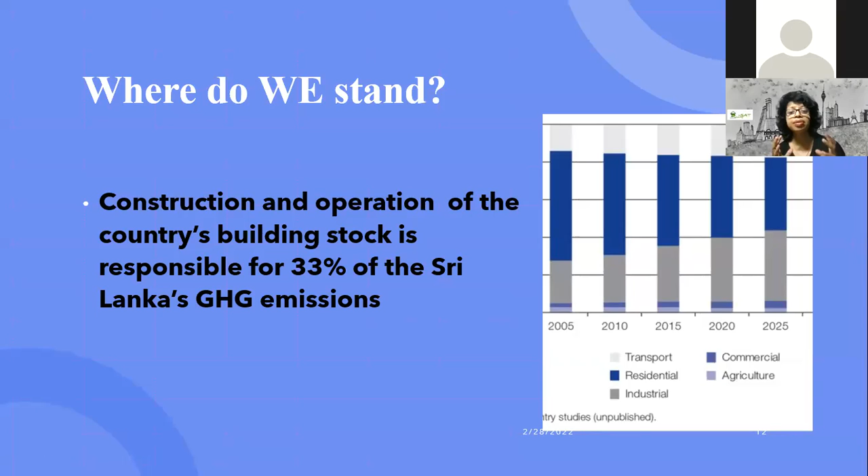The country's building stock is responsible for about one-third of GHG emissions in the country. That is a considerable amount that we have to seriously consider.

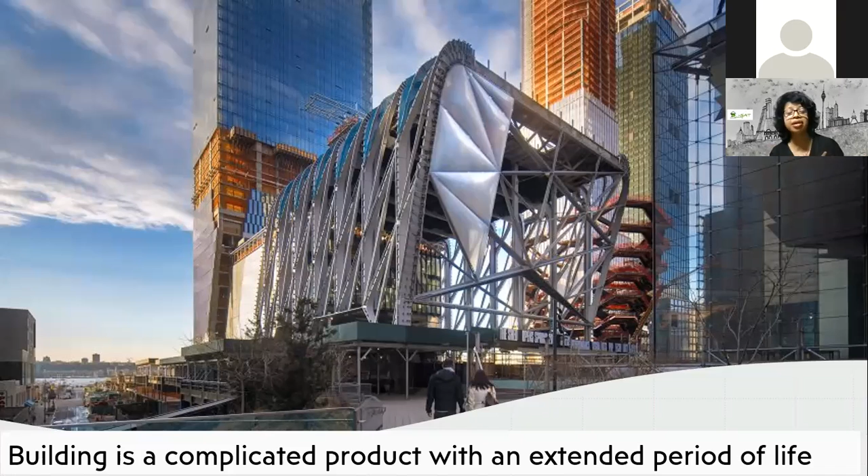Let's have a look at the specific buildings, considering that as a special product. We can say it's a complicated product with an extended period of life. Constructing a building would consume different types of building materials, and at that point it's like a large number of products, so it can be considered as such.

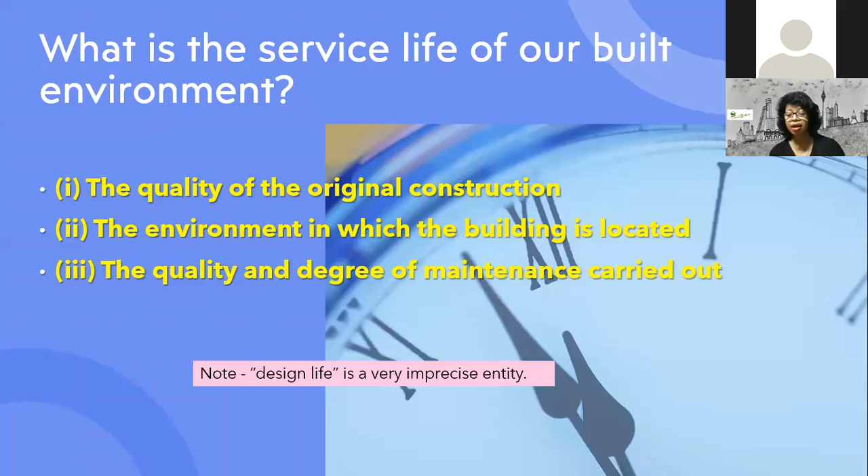Let's stop for one moment and think about its service life. Acknowledging the fact that the design life is a very imprecise entity based on the quality of the original construction, the environment in which the building is located, and the quality and degree of maintenance being carried out throughout the service life, you can identify the service life of all the different types of buildings in this kind of service life range.

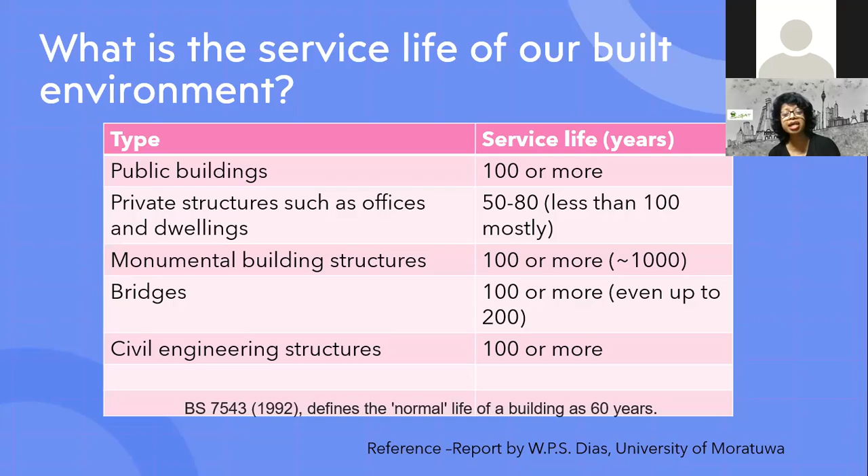If you look at public buildings, I have used a reference here, the report by Professor Priyan Dias of University of Moratuwa, and also as per the BS standards, defining the normal building life as 60 years, public buildings would last 100 years or more. Private structures such as offices and dwellings usually go up to 50 or 80 years. Most other monumental buildings, bridges, and civil engineering structures would last more than 100 years, let's say.

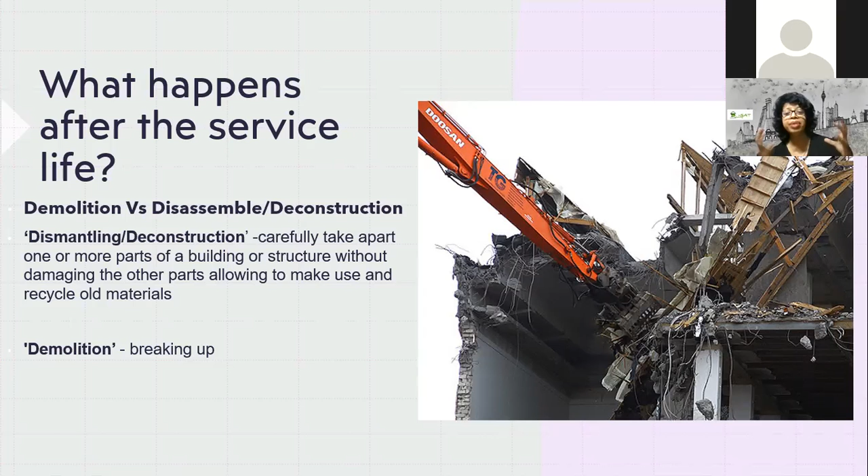So what happens after the service life? If you look at the Sri Lankan context, though I have put demolition versus disassemble, the most common terminology, or the concept being used in our country, is demolition. Demolition is easy to understand—it's like we are trying to take the building down or break it up. Dismantling, on the other hand, is kind of a process where we carefully take off the parts of the building, or rather deconstruct the elements, preserving them for future use.

So usually what happens in the country, in Sri Lanka, almost all the demolished structures end up in landfills. You can see there is no circularity in this model—it's a linear model. We take, make, and dispose.

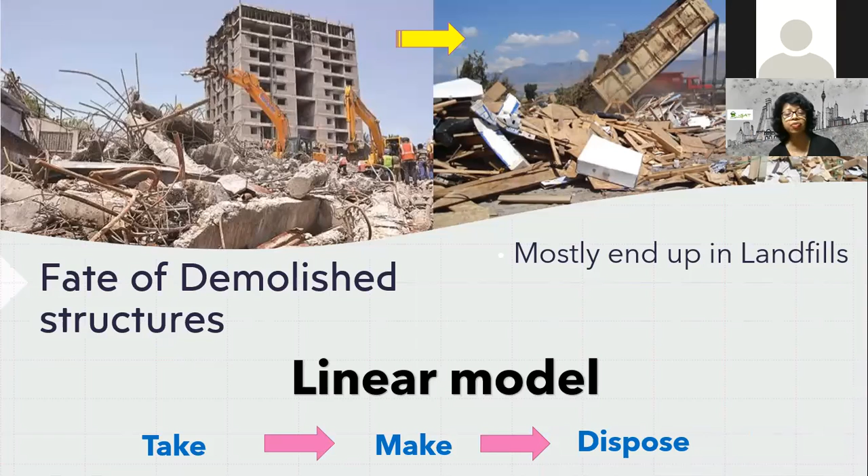Let's have a look at this disassemble and deconstruction concept, where we are much more familiar with the concept of urban mining, which is applicable for electronics—we know e-waste. The concept of urban mining has been around for more than 10-15 years. Similar to that concept of urban mining, we should be looking at constructed infrastructure as material banks, where we can deconstruct and extract the available resources that have gone into the construction.

This is the kind of full potential of the circularity of the built environment. Rather than looking at a demolished building as a heap of garbage or waste that has to be taken into a landfill, we have to change our thinking to see the usefulness of material. In the e-waste management industry, they have realized that we can mine more pure material like gold, silver, and other precious materials by urban mining. If you really look at aging buildings as material banks, we will be able to reap much more benefits than what we can even imagine today.

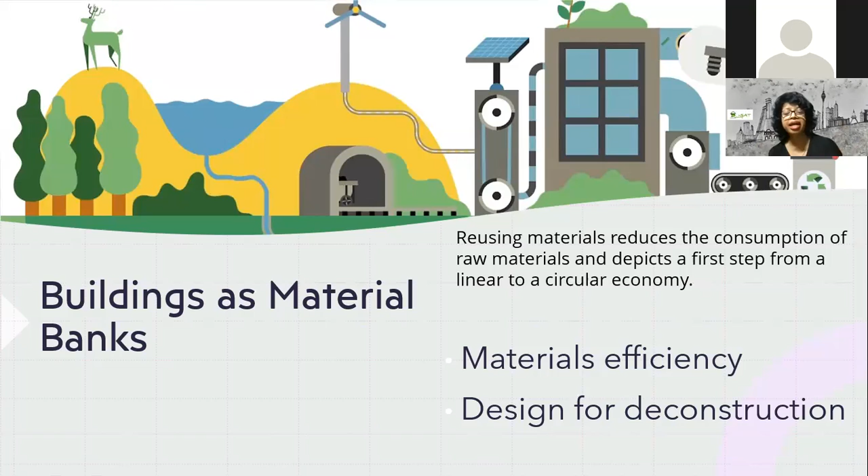When you look at this concept of buildings as material banks, at the end of the service life, we can readily understand that reusing material reduces the consumption of raw material. This is the real meaning of circular economy—preserving the material and keeping it for reuse and recycle. So we are concentrating on material efficiency and concepts like design for deconstruction. These are topics we have to consider more and more if we are investing in ideas like buildings as material banks, because for deconstruction, you need to think about it right at the design and construction stage itself.

So let's have a look at what is circular construction. Most of the time, we would like to think of circularity in construction with respect to material, or closing the material loops only. But if you look at it holistically, circular solutions on the level of material, processes, and the building itself as a whole need to be incorporated to ensure circularity in the built environment—not only material, not just closing the loop of materials.

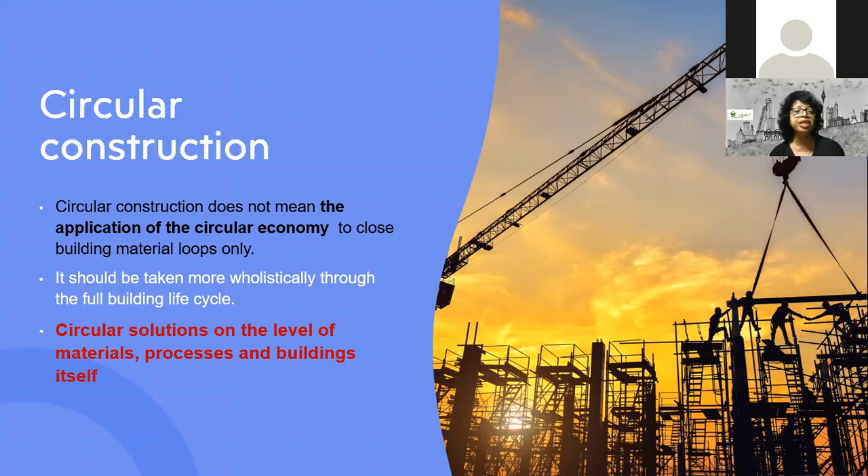Going further into the Sustainable Development Goals, we have to understand that circularity is a way to achieve sustainable consumption and production. Also, when we talk about the built environment, we have to understand that it is interconnected with the other goals of the SDGs among the 17.

We can see that the impact of buildings and the construction sector was recognized as a key contributor to global emissions for the first time at the Conference of Parties, COP21, in 2015. So this is something very timely and essential that we all have to understand.

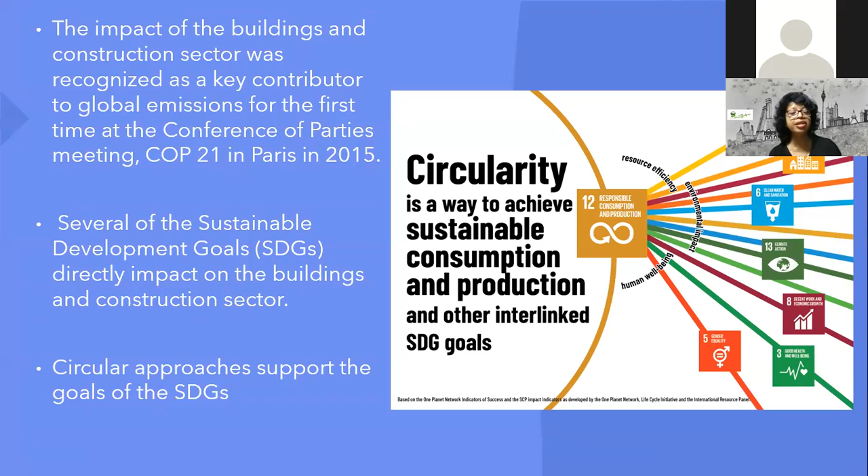Several of the Sustainable Development Goals directly impact the buildings and construction sector. I'm not going to take time to go into these areas, I'm sure you are familiar with these 17 SDGs. Circular approaches definitely support the goals of the SDGs, so we have to keep that in mind as well.

I would like to draw your attention to the NDC submitted by Sri Lanka in 2021. Despite Sri Lanka being a low carbon economy, having a low carbon footprint, and also being in a highly vulnerable status right now, we have committed to increase forest cover by 32% by 2030. And most importantly, we are planning to reduce GHG emissions by 15%, quite ambitious, isn't it? And that is by 2030.

So within the next 8 years, we have a target to achieve, that is from the power sector, electricity generation. You can understand most of this energy is consumed in buildings in Sri Lanka. If you look at it, more than 30% of the generated electricity is used by the building sector.

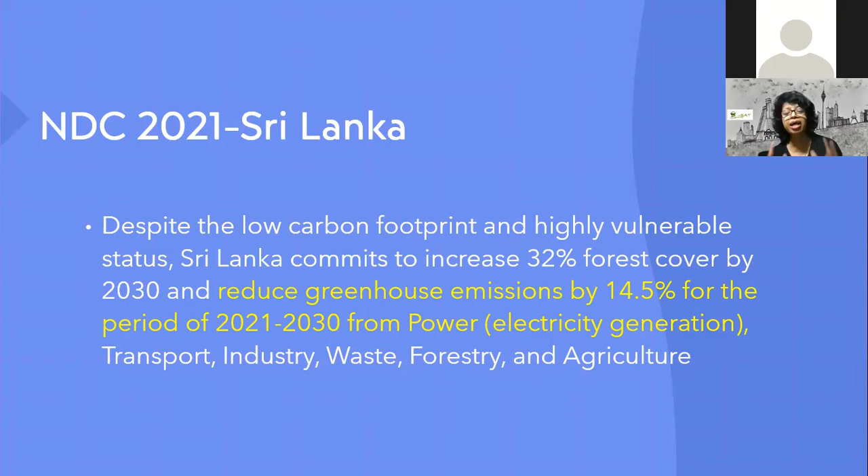So you can see we have a large say in this commitment, and we have to deliver. The construction industry as a whole has a responsibility to support this. So what does that imply? The building sector should act fast if we really need to meet the Paris Agreement by 2050, within the next 30 years. So what does that imply?

We need to think differently. The theme of our future buildings should be climate resilience, and we can achieve this through different mechanisms, which you have probably been learning about already: efficient use of energy, efficient use of material, and efficient use of water.

There are ample examples around the world if you really want to move towards net zero achievement. So the way forward in this aspect would be the keywords that we have to go after, like standardization, new forms of collaboration and co-creation processes, digital innovation, education and information sharing. These are the key elements we need to incorporate into our thinking and actions.

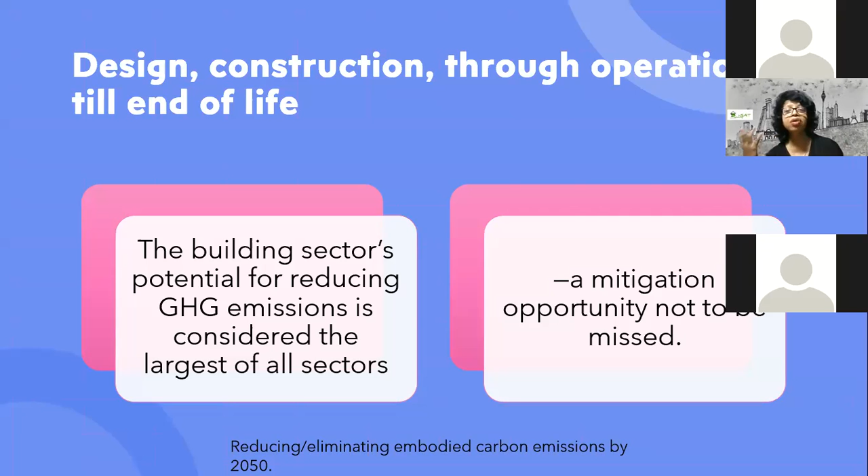Again, we can see the potential of the building sector for reducing GHG emissions can be considered the largest of all sectors. This is an opportunity we should not miss. We have to consider this through design, construction, operation, till end of life.

So that means whatever decisions we take during the design and construction stage will impact the long operational years of a building, as I indicated, maybe 100 or more years till end of life. So what are the actions we have to take during design and construction?

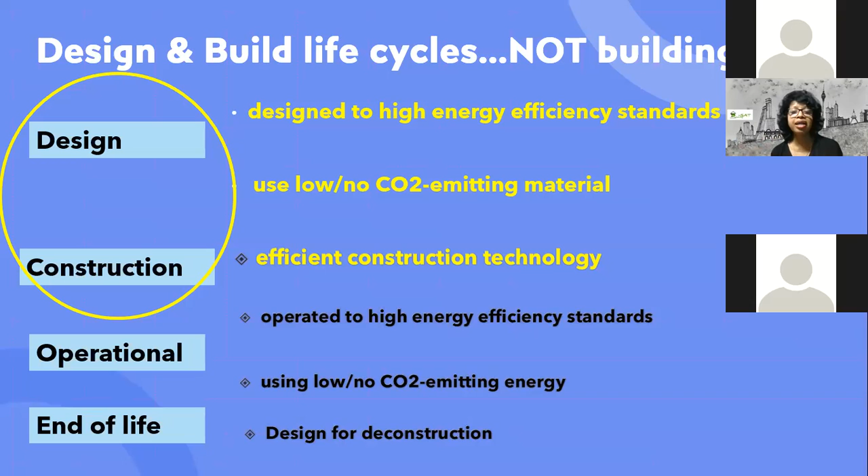We should pay attention to designing high energy efficiency standards in our buildings, and we can go for low CO2 emitting material, meaning selection of material should be done properly, and efficient construction technology use, and operate to high energy efficiency standards, using low or no carbon emitting energy as much as possible, and purposeful design for deconstruction, which is an aspect we rarely invest in thinking about even right now.

Again, it will not happen overnight, we have to work hard for it. It will demand revision of our current existing policies, and we have to, of course, develop clean technology with respect to energy and material development. And you have a higher responsibility in that respect.

Nothing will happen if we do not convince the policymakers and practicing entities. So what should be done? We would like to get them convinced, we have to show them, okay, these are the numbers, we need to have the ability to quantify. Right now, in Sri Lanka, this quantification in the building sector, to see how impactful our buildings are, is at a very, very low level.

If you can say, we don't have our own tools to do that, so we need to see where we are standing. We need to benchmark ourselves. So what is the way forward?

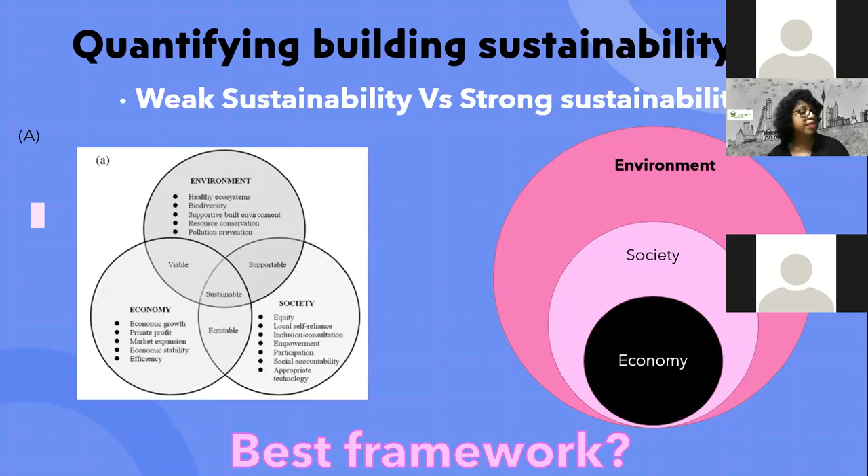At this point, we have to find the best possible mechanism to quantify building sustainability. We have to find out which framework should be used. I'm sure you're familiar with these two pictures, showing a weak sustainability concept versus a strong sustainability case. On the left, picture A is weak, and B is stronger, where everything is embedded inside the whole environment. Holistic thinking should be taken forward if you really need to quantify sustainability, especially in the built environment. Otherwise, it is not going to do the best job.

This is from a recent publication I've done with one of my research assistants, where we tried to evaluate the methods available for building sustainability assessment. In short, you can see how circular our buildings are by using different tools. I'm proposing this after reviewing the existing literature to see what tools are available so far. We found there are three types of tools: A, B, C.

The passive tools, where you can see green rating systems, guidelines, checklists—those can be considered passive tools. Then you have energy and ventilation modeling, which is a very strong tool, but it will optimize only one life cycle stage of the building, which is the performance and operation and maintenance stage.

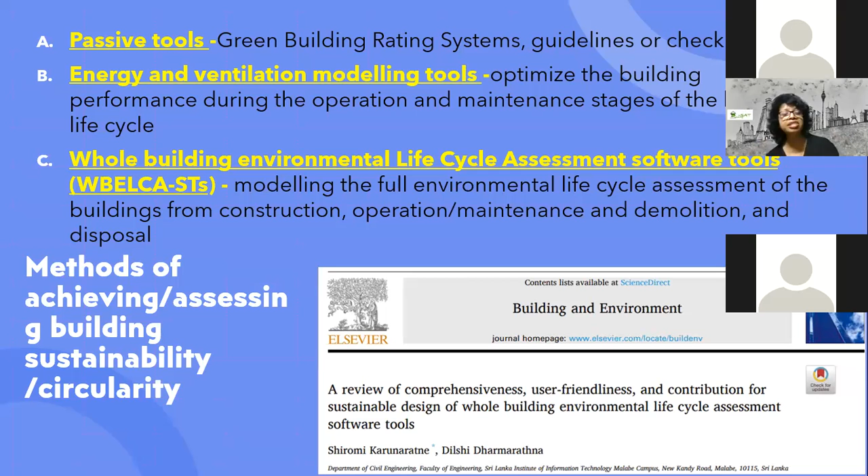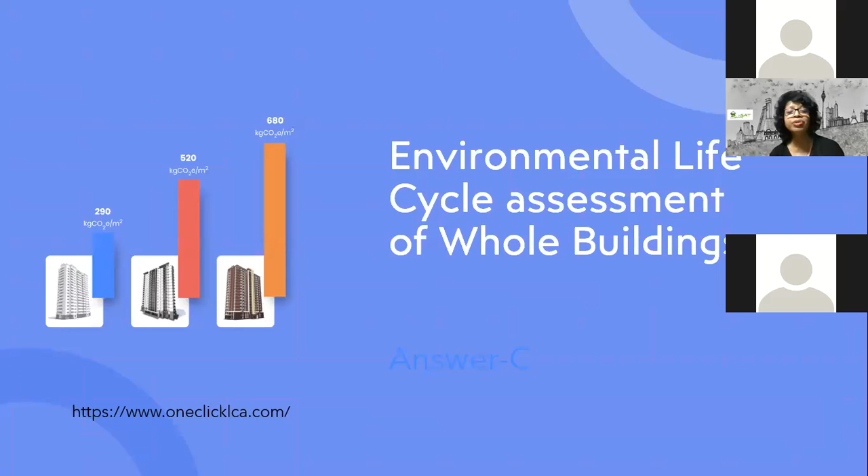If you look at the third option, whole building environmental life cycle assessment software tools, that will model the full environmental life cycle assessment of the buildings from construction, operation, maintenance, demolition and disposal. So if I ask you to select the best technique from A, B, or C, what would you select? Selecting the best assessment tool is important if you want to do proper analysis, proper quantification, proper benchmarking of our buildings to see how circular and sustainable they are. I'm sure you would agree with me if I select tool C, the environmental life cycle assessment of the whole building.

This is the methodology we all know as life cycle assessment, which is a well-defined methodology, but extended to a very complicated product, which is called a building with an extended life period. So if you look properly, what are the mechanisms available to do a whole building life cycle assessment?

Again, we can see there are three types of software tools that are widely used. That is the modeling tools that can be used at material level. You can see a building as a product, a complicated product which has hundreds of materials. So you can see the difficulty of using material level tools at whole life cycle building scale.

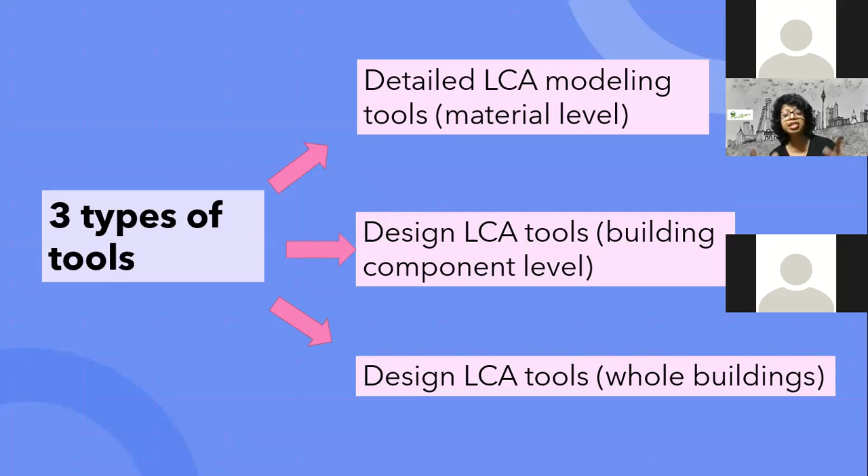Then you can see the design tools which are at component level. We have a large number of building components in a whole infrastructure building. Then we have the design tools for whole buildings. So which is the most convenient way of assessing buildings?

We have found that choosing the appropriate tool for authentic assessment of building environmental life cycle assessment involves some key elements we have to consider. If you look at the tools, we have to see they are sometimes designed for specific types of buildings, and they are sometimes applicable for specific life cycle stages only. And sometimes the analytical capabilities are limited, or we have to select which analytical capability we need.

Most importantly, what kind of databases are associated? Is it freely available with it, or do we have to import the databases? Also factors like the level of expertise required and the user friendliness of the tool, which is an implication, and what are the input requirements, and what kind of standards are being used within the tool. So those are the parameters we will have to decide when choosing the most appropriate tool for our assessment.

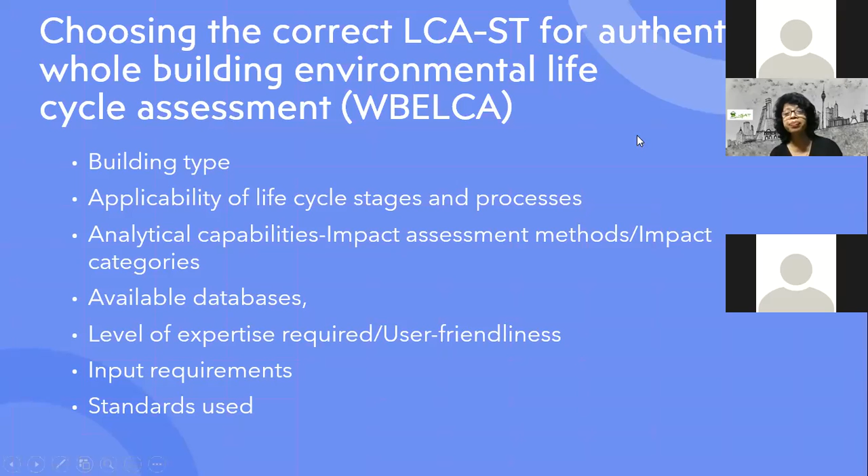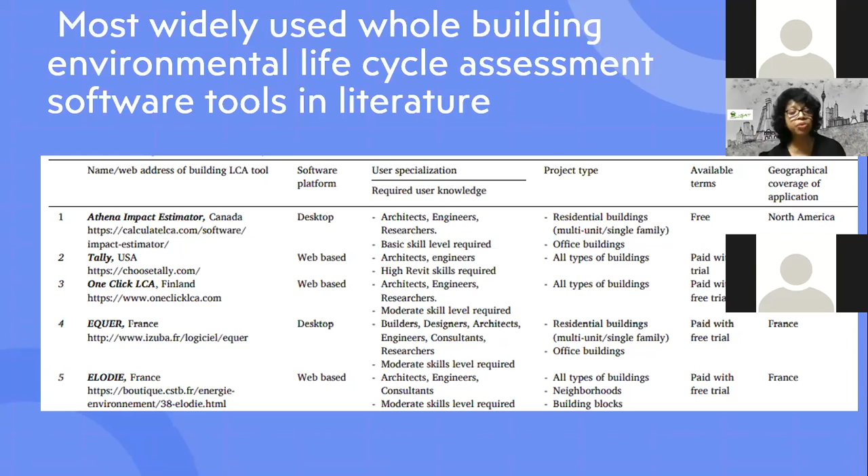Then we try to evaluate in this publication the most widely used whole building life cycle assessment tools in the literature during the recent past. So we found that there are numerous tools, and we were able to shortlist 16 tools, the most widely used tools. I'm not going to go into details of each and every tool, but this is how we tried our evaluation.

So we tried to look at all these tools with key overarching attributes, how comprehensive the life cycle approach they have used, how user-friendly the tool is, and how the tool contributes to the sustainable design of the building. And we try to look at different aspects of the tool with respect to data inputs, data analysis and interpretation, output results, tool structure, and databases.

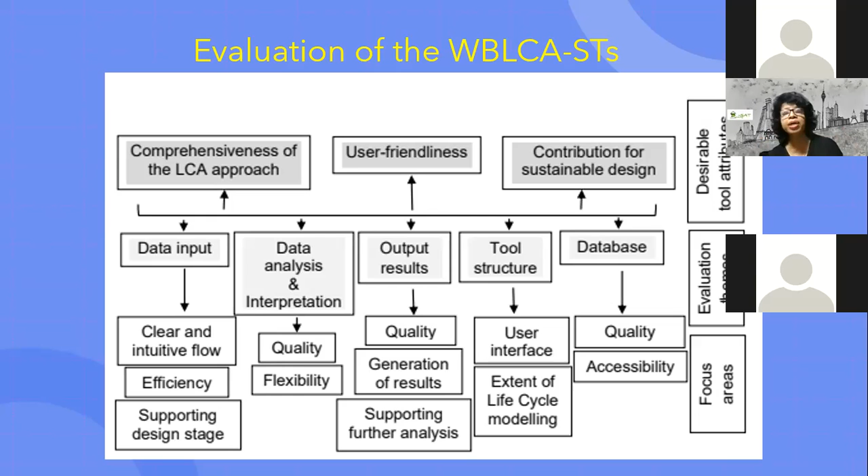So out of the first round of evaluation, we selected 16 tools. You could see more than 80% of the tools had originated in the European region, which means most of these tools are not readily applicable in Sri Lanka. There were also 2 tools from the American and Australian continents.

So you can see a lot of hard work has gone into the development of life cycle assessment tools in the European region, and they have achieved remarkable achievements too. You can categorize these tools as software, desktop versions or web-based versions, so those are the two types of versions you could see.

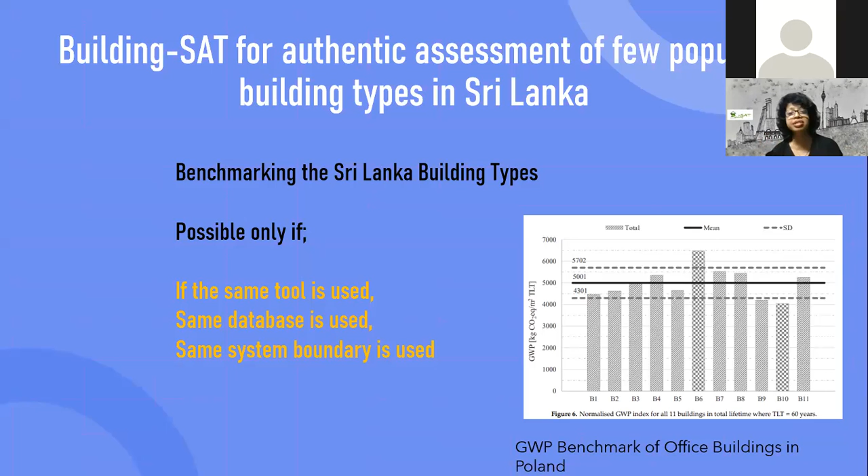This is a process of benchmarking Sri Lankan buildings, because we have different types of buildings in the country. So if you really want to set a target for different types of buildings, you have to first benchmark the existing building types using the same type of building tool, using a similar database, and using a similar system boundary.

So the research is continuing. This is the first step, the first outcome of our research. We have included in the tool the calculation of global warming potential only.

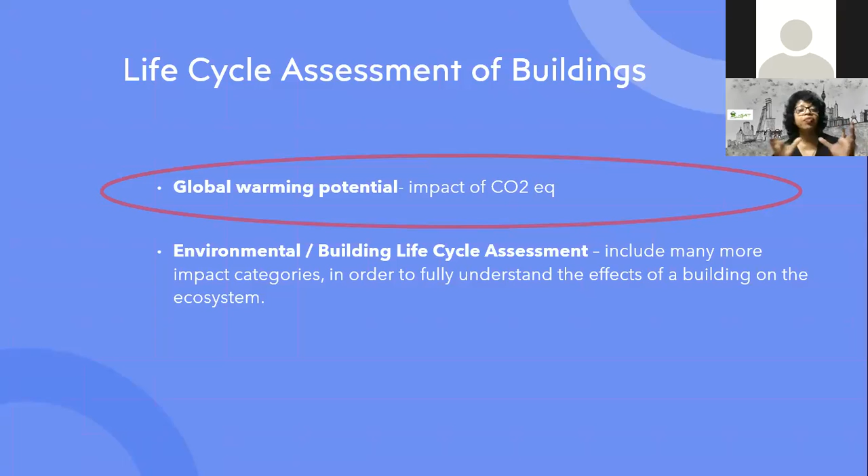We have identified that as the most important environmental impact in the world today, that is climate change and global warming. In the second phase, we are planning to go into the other environmental impact categories. But you can do a full life cycle assessment considering all the building life cycle stages for the parameter selected, which is the global warming potential.

So with respect to the tool we have developed, we have looked at the user friendliness, how comprehensively we can carry out the life cycle assessment, and how we can use this tool so that we can enhance building sustainability during the design stage.

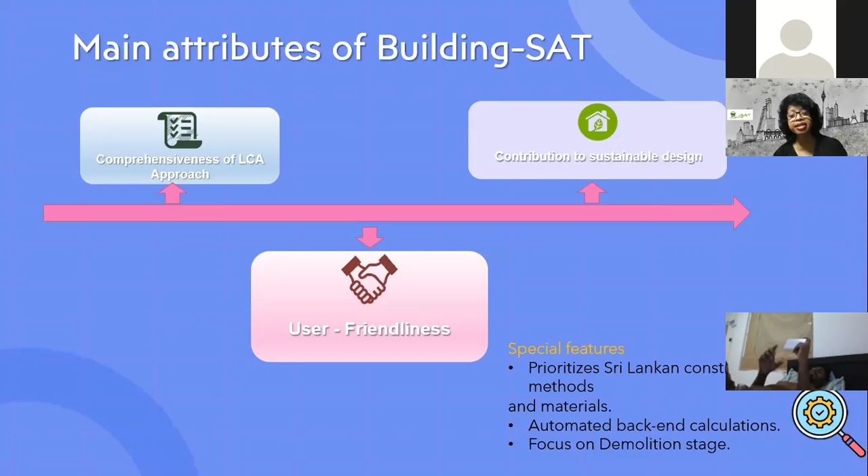As I indicated, we have prioritized Sri Lankan construction methods and processes as much as possible, and we have incorporated Sri Lankan materials in the database. We have facilitated the user with a lot of automated backend calculations so that conducting the life cycle assessment is not very complicated. Especially, this has a demolition stage analysis, because many tools lack this aspect of the life cycle stage.

So how can we start, or how can we do the analysis? As I said, we have incorporated all 3 life cycle stages: construction stage, operational, and demolition stage. You can use simple input techniques, using the bill of quantities and structural drawings to extract input data. And the inbuilt database with emission data will do the rest of the calculations for the user.

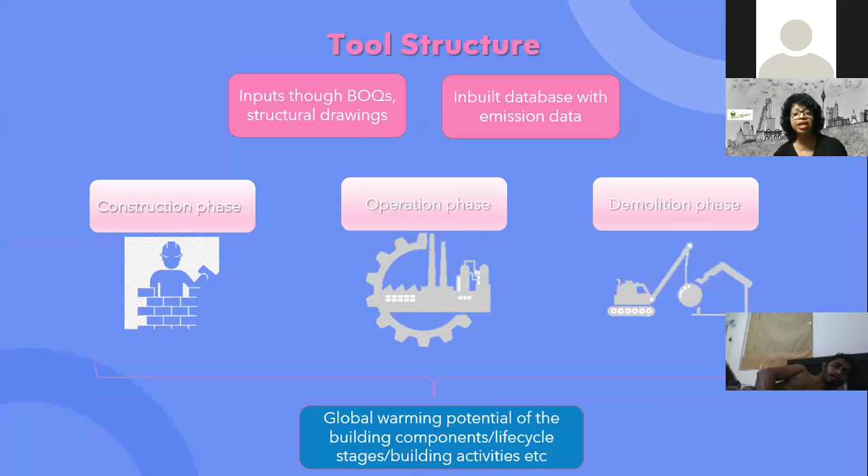We have incorporated the local construction processes, especially earthwork, in a little more detail than the other tools—I would say much more in detail. And how the machinery used during the construction stage would interfere or play a significant role in the construction process—we have taken that into consideration in a unique manner.

We have also looked at the replacement during the operational phase. We know different building components have different life cycles, different service lives, so replacement is also considered. The demolition phase has been taken in detail, considering the demolition activities, and if necessary you can salvage a certain amount of material, and then put the rest into the landfill. So these are some of the key features of the tool.

I'm sure you will not be able to get a full picture of this, but with the limited time, I will not be able to go through it in much detail.

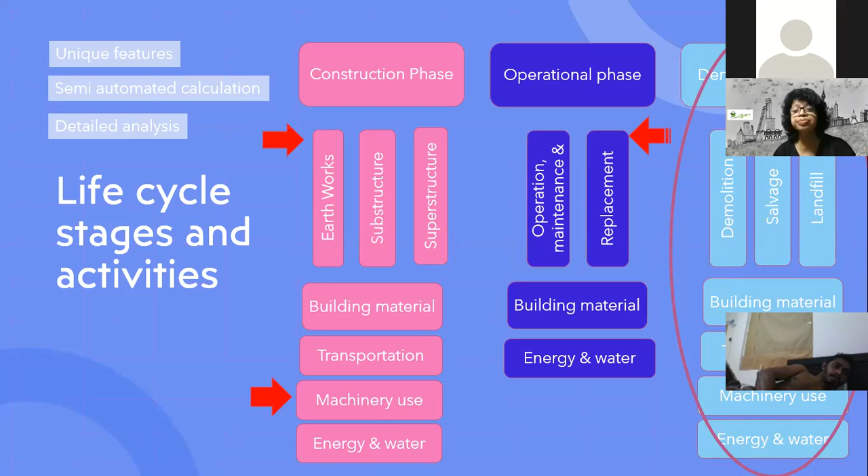As of now, our database has over 1,000 data points available with the tool, and we have different databases which include material data, machinery data, and transport-related data. As much as possible, we have incorporated local data through different studies, and since as a construction industry we also use imported material, in such cases the EPDs available were really useful for us.

So this process of extracting material data has gone through a rigorous data quality and checking process. Only after that have we incorporated this data into our database.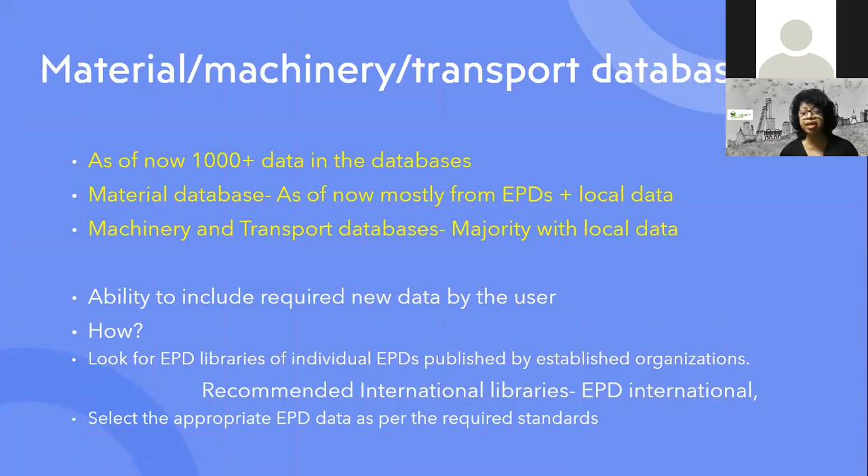Now, as a country, how we can support, how we can get the results, how we can use it. Now, if you look at the green building GREENSL rating system...

Under 5.1.7, you can claim 1 point for calculating the carbon footprint of your building, as it calls upfront carbon emissions. Apart from that, we can use this tool to optimize the overall sustainability of the building by identifying the material hotspots, construction technology related hotspots, and operational hotspots.

This will be useful to reduce, even during the design stage, you can use this to reduce the life cycle impact of this building. And we can perform extended calculations and estimate the abatement cost of various sustainability options. The tool doesn't provide this option right now, but the results generated can be used readily to do this calculation by the user.

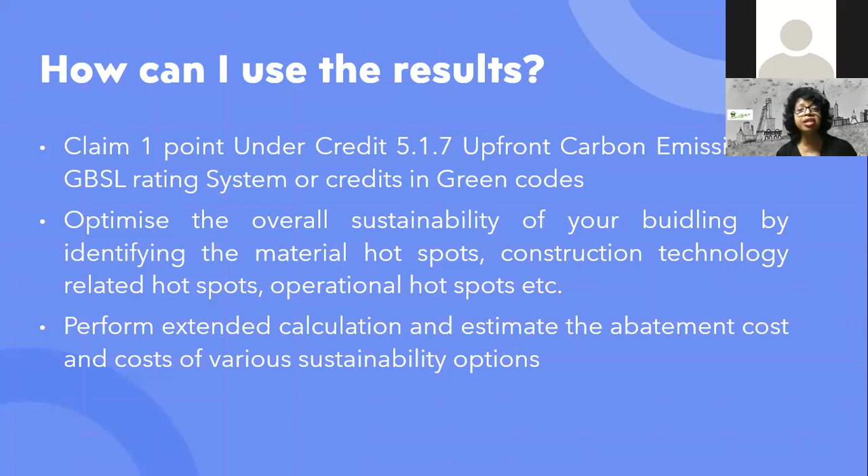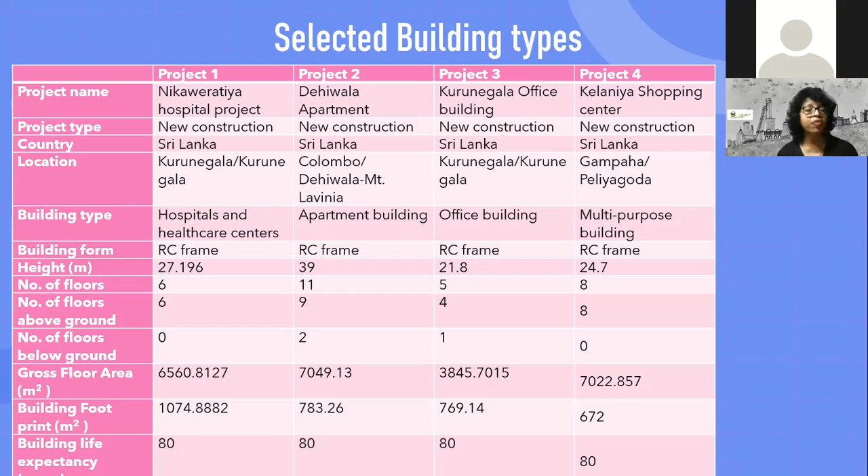And I will be sharing some of the results that we are developing at this moment to benchmark the global warming potential of different types of Sri Lankan buildings. These are some of the most widely used or built building categories in Sri Lanka, like hospital buildings, apartment complexes, office buildings, and shopping complexes. We have a pool of data or BOQs ready, and we are in the process of assessing the buildings, around 30 buildings in the queue. So I am sharing with you about 4 very summarized results of 4 types of buildings here.

So through the analysis using the tool, you could see the results, the global warming potential of the building in the 3 building life cycle stages: during construction, during operation, and during demolition. It's not a new invention to say that the operational phase of the building emits the most. That is understood. But in this exercise, we could quantify it.

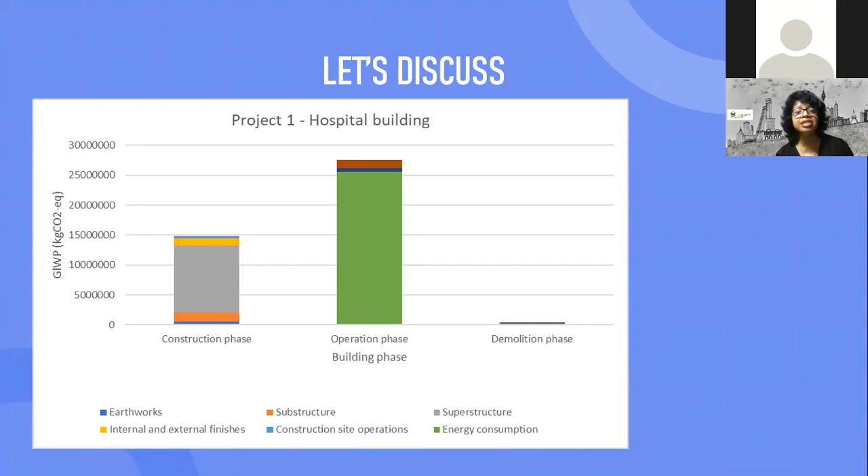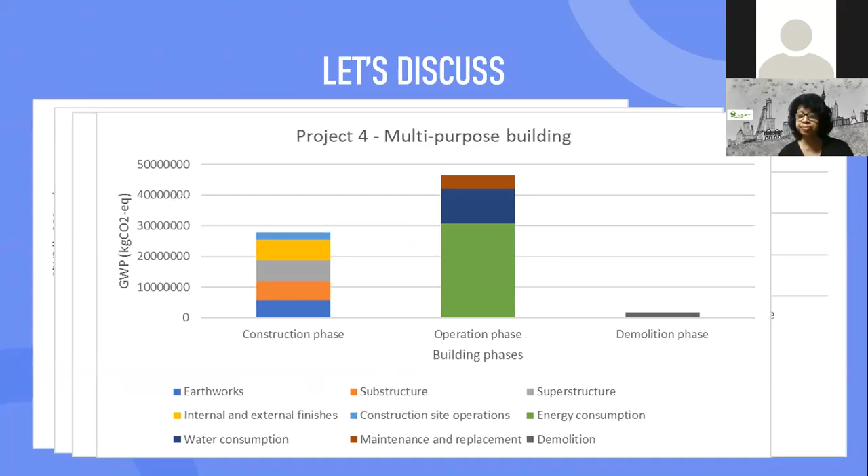You can see what kind of construction activity is emitting the most - whether it is earthwork, internal and external finishes, whether it is coming from the substructure or construction site operations, superstructure, or during energy consumption during operation, and so on. So you can see the details so that you can further analyze and try to understand where it is coming from. The same exercise for the apartment buildings and the office building - you can see a similar trend, but the contributions are unique for each building, for the multi-purpose building. You can further do your analysis in different life cycle stages as well.

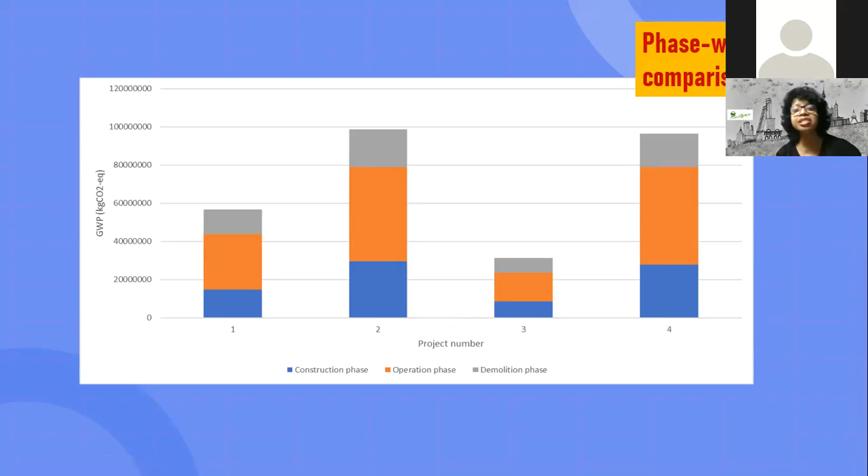Now this is a comparison among the 4 projects, and you can see the total emission with respect to different projects. I am not going to go into detailed discussion at this point - if you have any questions, we might be able to have time. So again, you can see the comparison done with respect to machinery use, material use, transportation, energy, water.

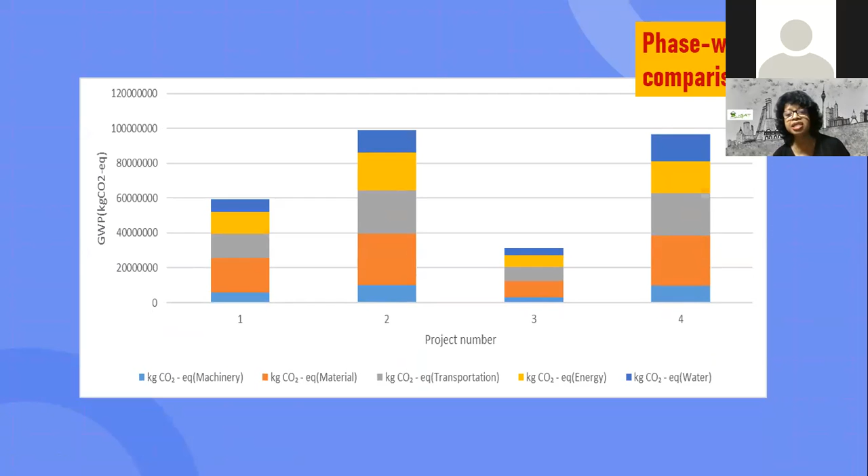So the analysis can be as detailed as possible. These are some glimpses of the analysis, but this is not the total analysis you can see.

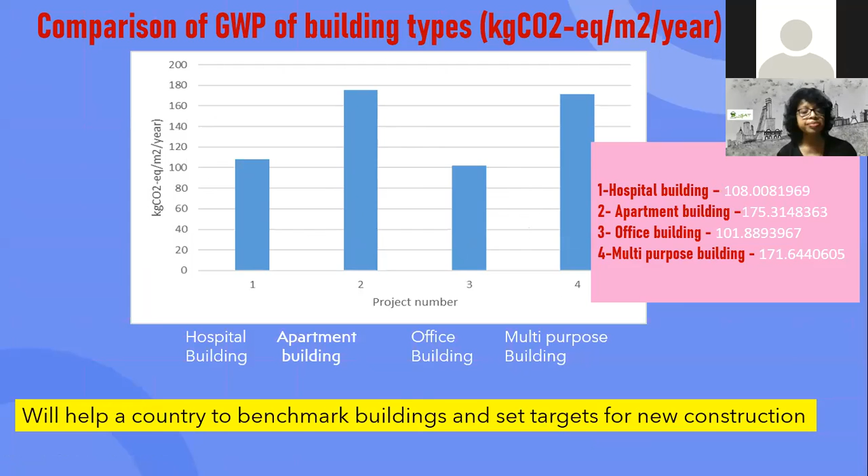So as a concluding remark, I would like to place this on record: the circular economy will not thrive if we do not identify the correct business case. So it should be a business strategy. For investors and construction clients, we have to show the potential in this as a business strategy rather than just a sustainability assessment exercise. And also this life cycle assessment can be considered as a very strong tool to achieving the overarching goal of business growth as well.

Designing and constructing buildings based on circular principles, closing the loop on building construction and demolition material, and building circular cities would provide definitely new business opportunities. This is where we need to highlight and bring up this concept so that we can convince the clients and investors. And apart from creating jobs, application of the circular principles will support the building resilience that we require so much into the future.

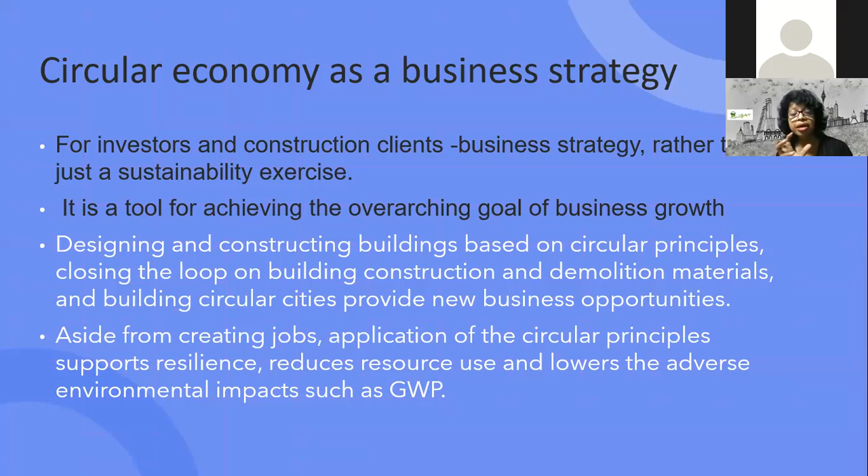It will certainly reduce the resource use. Remember the material banks that we were discussing, and lower the adverse environmental impacts such as global warming potential. So at this point, the tool was able to quantify this global warming potential.

With that, I think I am closing this presentation, and I'm hopeful through the circularity of the built environment, we can make a change. We can make a difference in the lives of the people who are going to live on this planet in the coming years. Thank you so much for your time and listening, and I'm open for any questions and discussions.